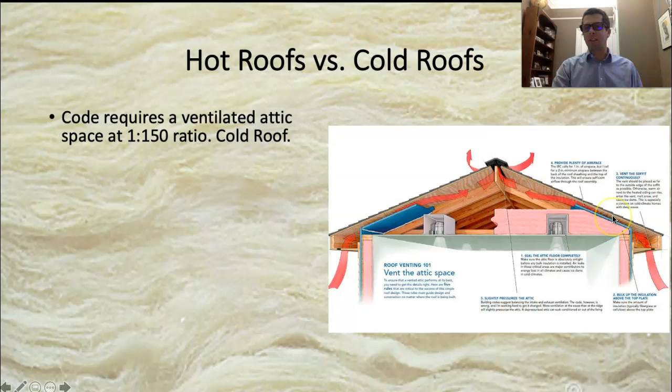Anyway, this is a cold roof. The thermal barrier is at the ceiling, if we've drawn a line where the thermal barrier is going to go on the house, along the floor, up the walls, over the ceiling, and we've made a loop. Here's another picture of some baffles right here, stapled up against the roof deck. This is providing a ventilation chute up this roof, keeping the sheathing cold and dry.

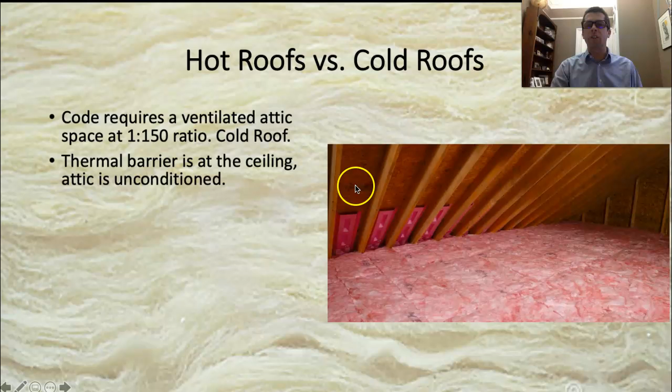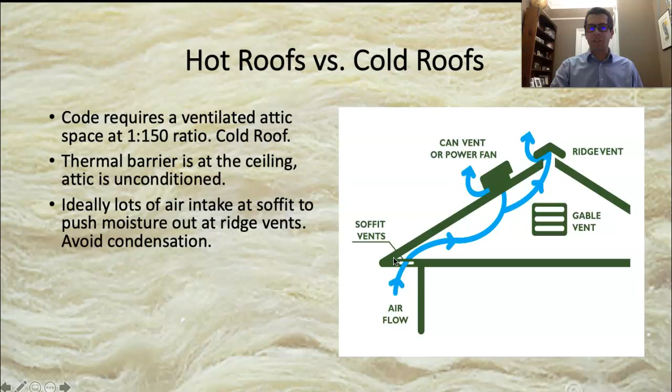Okay, we can really, like I've said, hot rod that ventilation system with a ridge vent. The more air that we're pumping through this thing, the better. The more air that's moving, we're going to move any moisture laden air out, and we're going to avoid problems with condensation.

What tends to be the drawback with these cold roofs is that the temperature of our attic is usually the opposite of what we have in the house. In the wintertime, the attic's freezing, because we're introducing outside air into it, and it's really cold in the attic. We're trying to keep our house warm. Depending on what kind of insulation we've got on that ceiling, and how good of a job we've done with the air sealing, that can depend a lot on how much thermal transfer is happening between the house and the attic.

Same thing, if it's really hot in the summertime, the attic's going to be 140 degrees, and we're trying to keep the house 70 degrees or something like that. There can be potential for some thermal transfer from the attic to the conditioned space. And then that problem is kind of exacerbated if we've put all the ductwork up in the attic. And this is a really common thing to do. It's been the practice for 40 years now, to put everything in the attic.

There's nothing else up there. It's out of the way. It's easy to run all of our ductwork around, okay? But this is a problem. Let's say it's 140 degrees up there in the summertime, and we're trying to run our air conditioning through that space. We're trying to run 55-degree air through a space that's 125 degrees, and it's going to get heated up. Even these insulated ducts are only insulated to like R6 or something like that. So we're going to be fighting nature by doing it this way.

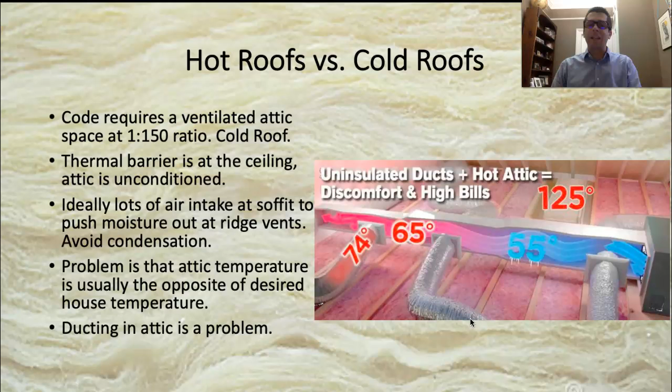Conversely, it's really cold in the attic. We're trying to run the heater for the house. We're trying to run hot air through a cold space. It doesn't make a whole lot of sense. And then the best thing to do is to just take the ducts out of the attic and put them in a conditioned space.

Now, an alternative to this is to have what we call a hot roof. We're not venting the attic. It's completely unvented. It's conditioned, and it's totally insulated. We've moved that thermal barrier up to the roof line. Now this makes sense. If we want to have stuff up here, if we want to have our ductwork up here, we kind of have to condition this attic and create a hot roof assembly.

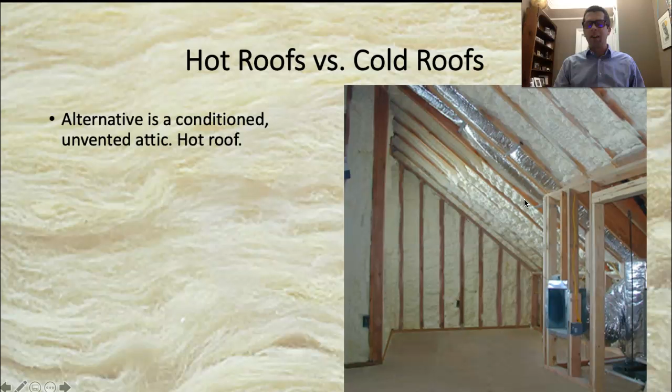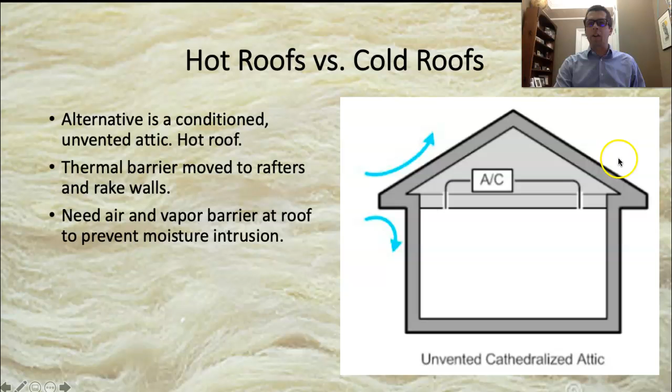For reasons I've talked about previously, though, this is potentially problematic. When we have to create an air and vapor barrier here, that is kind of a risky assembly. The easiest way to do this is to just foam everything. You can see they've come in and they just foamed all of these rafter bays. It's easy to do, but it is risky for this reason. If we've taken away the capacity for the attic to vent, any moisture, any air that does get in there is going to get trapped right here, and it's not going to have a way out.

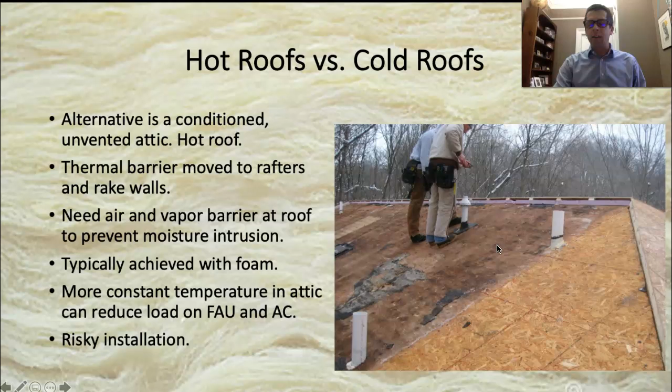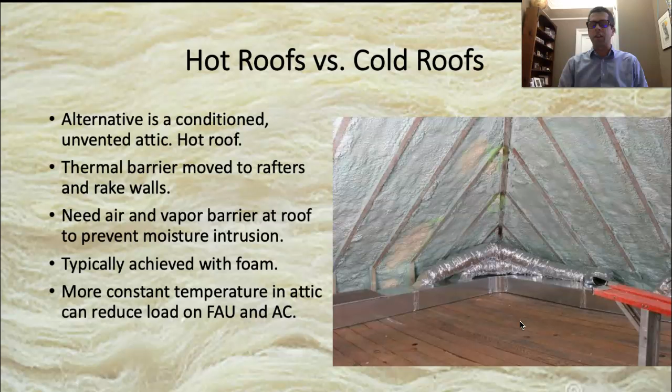But just back to one of the good reasons potentially for this, if we condition this space, if we fully insulate it and move that thermal barrier up into the roof, then we can have the ductwork up here. I am of the school of thought that says, let's just take the ductwork out of the attic. Put the ductwork in the conditioned space so that the air moving through that ductwork is a similar temperature to what's in the house. We're not fighting it as much by having it in a really hot attic or a really cold attic. We can save a lot of energy that way. It's a lot easier on the equipment also. The forced air unit, the air conditioner, is not going to be fighting it constantly.

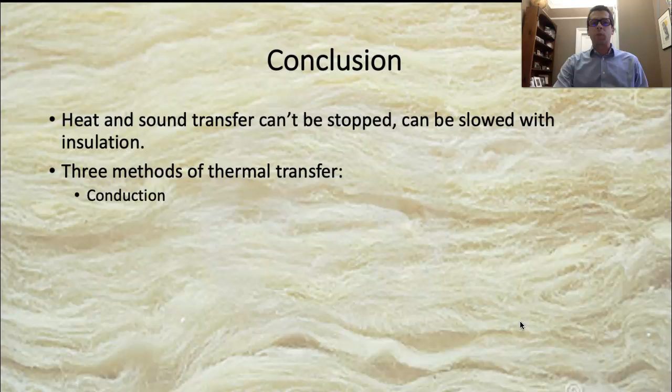So to wrap it up, heat transfer is going to occur. We can't stop it. All we can do is slow it down, depending on the type of insulation we have and the thickness of the insulation we have. Remember those three methods of heat transfer. We've got conduction, heat moving through solid materials; convection, heat moving through liquids and gases; and radiation, heat moving through visible and non-visible light.

All of these materials have their benefits. You can do a really effective job with any insulating material. You can do a good job, get a good R value out of it and have a comfortable house. Some materials are going to be better than others depending on your situation, depending on what kind of house you build and what choices you want to make with the materials that you buy. But a lot of it comes down to the installation. I would say that's one of the things that's really appealing with spray foam. There's this saying, foam it and forget it. Somebody comes in and spray foams everything, it expands into all the cavities, and you don't really have to pay a lot of attention to the details.

But I'm going to make one more pitch to get you away from spray foam. It's really, really expensive, and not only monetarily, but I would say the environmental cost is really high. And fiberglass insulation is dirt cheap, and you can achieve the same results depending on what kind of job you do and how you pay attention to details.